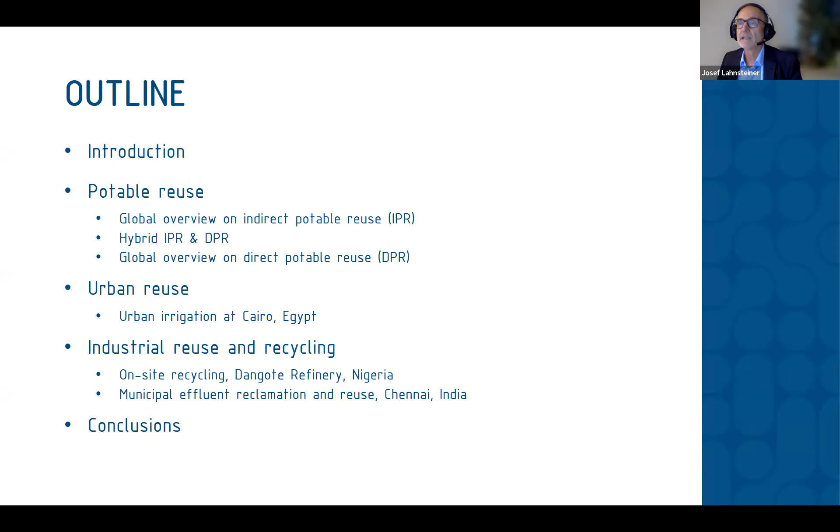The major drivers for water reuse and recycling are, first of all, water shortage caused by climate change, population growth, urbanization, and industrialization in developing and emerging economies. There are, of course, economic reasons. Used water or wastewater is a drought-proof resource. There's a lower freshwater demand, reduced wastewater discharge fees, and resource recovery is an option. Very important, there is a boost in water supply security, and last but not least, policies, regulations, and guidelines - for example, the treated wastewater reuse policy of the Indian state of Tamil Nadu, issued in 2019.

Now I will come to potable reuse. The major indirect potable reuse projects are in this slide. I would say Orange County and Singapore are the most prominent ones. Orange County was a pioneer, starting with the Water Factory 21 in 1976, and the groundwater replenishment system was started up in 2008, and the extension was extended in 2015.

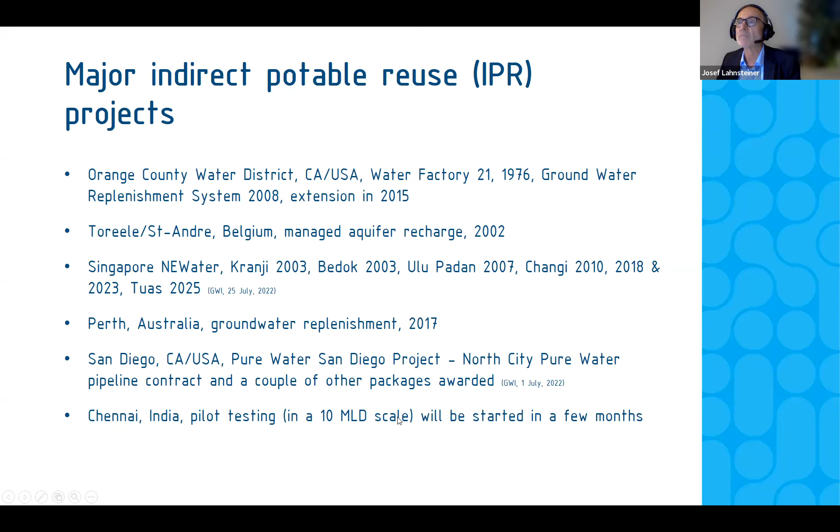The Singapore IPR scheme, New Water, is blended, but only during dry periods, with other sources - rainwater, raw water imported from Malaysia - in a reservoir, the environmental buffer. The blended raw water is treated in a conventional waterworks and distributed to the population. The sewage or used water is treated in a sewage treatment plant, which they call a water reclamation plant. The secondary effluent, the water, is reclaimed in the new water facility. Most of the water goes to industries, and as mentioned, only a small part is used for IPR. They use an RO process, therefore the RO concentrate has to be disposed of.

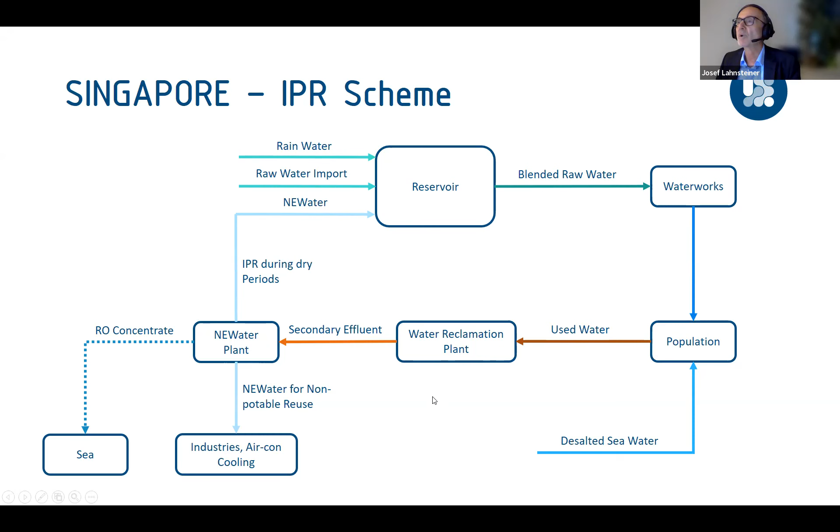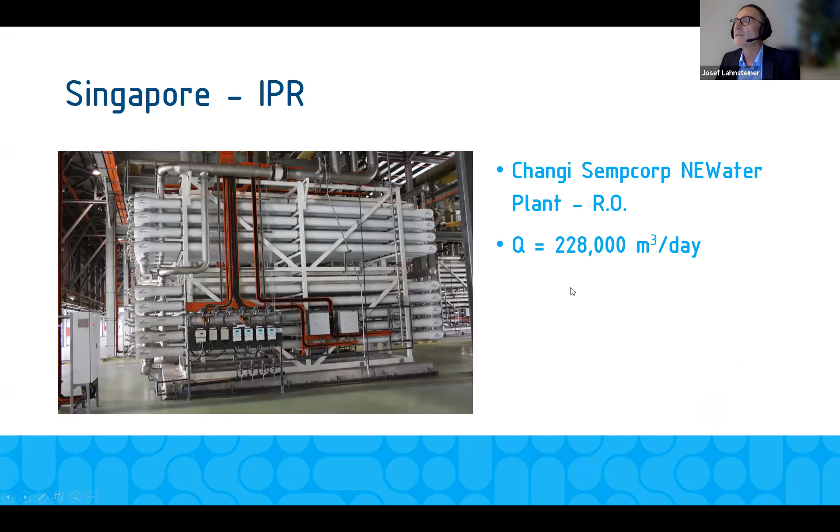This is the reverse osmosis process unit at Changi Sembcorp at the plant, and the capacity is 228,000 cubic meters a day.

And now I come to a hybrid project. It's IPR and DPR.

During regular rainfall, the reclaimed water is blended in an environmental buffer in the Gaborone Dam during droughts. The empty, silty environmental buffer is bypassed, and then DPR is practiced. The project is in the tendering stage.

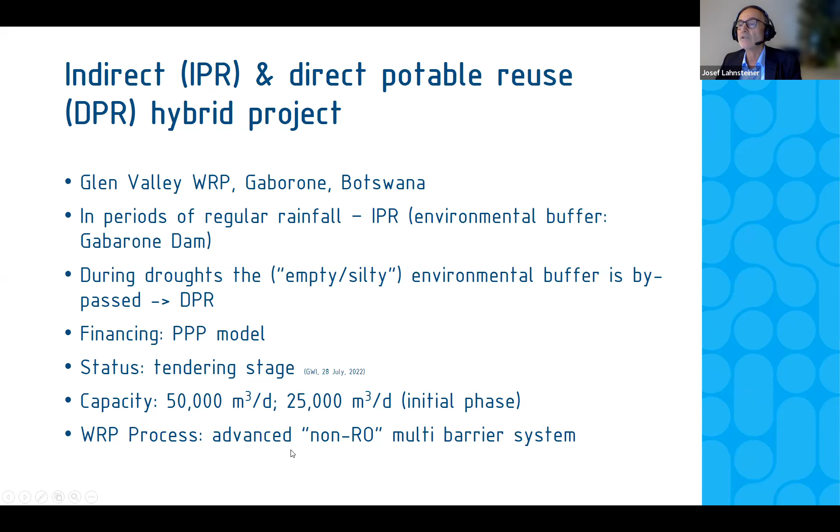It can be expected that the contract will be awarded in September or October. The initial phase capacity is 25,000 cubic meters a day, finally extended to 50,000 cubic meters a day, using a non-RO multi-barrier system. The scheme of this hybrid system: sewage treated in the Glen Valley used water treatment plant or sewage treatment plant, polished in these ponds, then treated in an advanced water reclamation process.

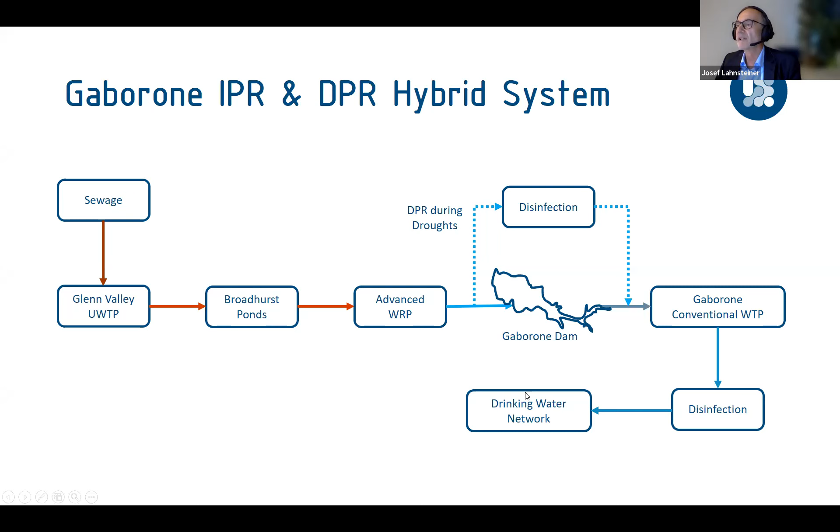As mentioned, during droughts, the environmental buffer is bypassed. Then we have DPR, and the blended dam water is used during IPR, and also DPR is treated additionally in a conventional treatment plant, the Gaborone water treatment plant. After disinfection, the water is distributed to the drinking water network.

Now, DPR projects. Windhoek, Namibia, started up already in '68, the old Goreangab water reclamation plant, which was operated until 2002. In 2002, the new Goreangab water reclamation plant was started up and has been successfully operated, meanwhile, for 20 years.

Another DPR project in Southern Africa is Beaufort West, a smaller one started up in 2011. Big Spring in Texas, blending operations started in 2013. In Wichita Falls, there was an emergency operation for 1 year. After sufficient rainfall, they switched to IPR.

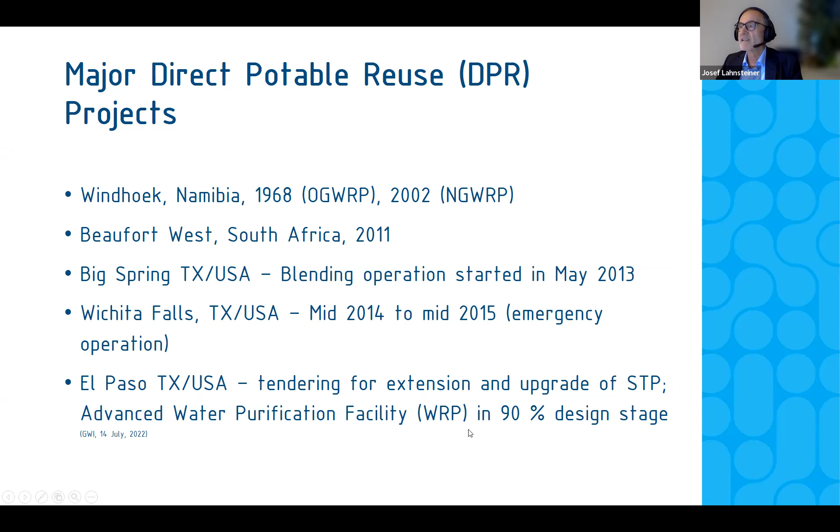And El Paso, also in Texas, this project is in the tendering stage of the sewage treatment plant. The sewage treatment plant will be extended by disc filters and UV in order to get a high quality water, secondary effluent or a tertiary effluent for this advanced water purification facility, which is in a 90% design stage.

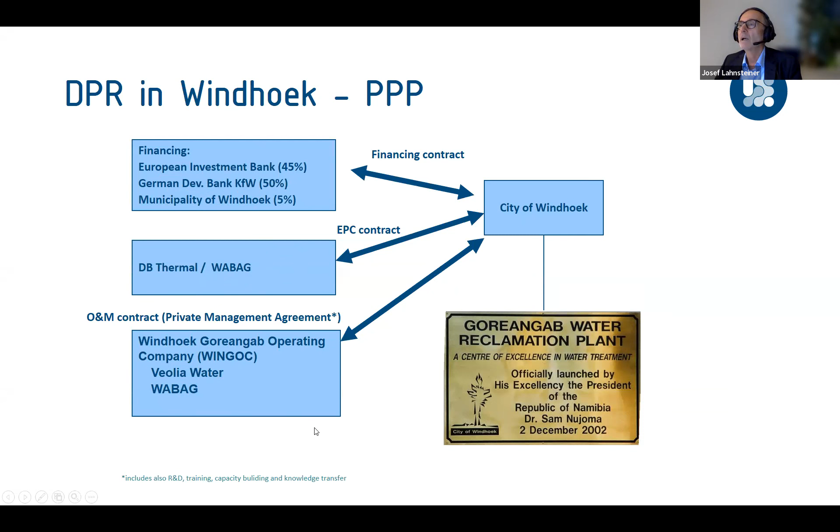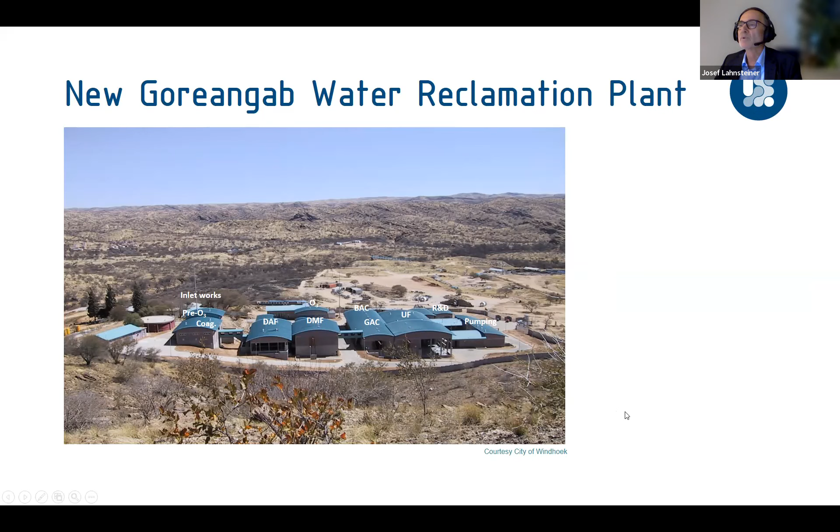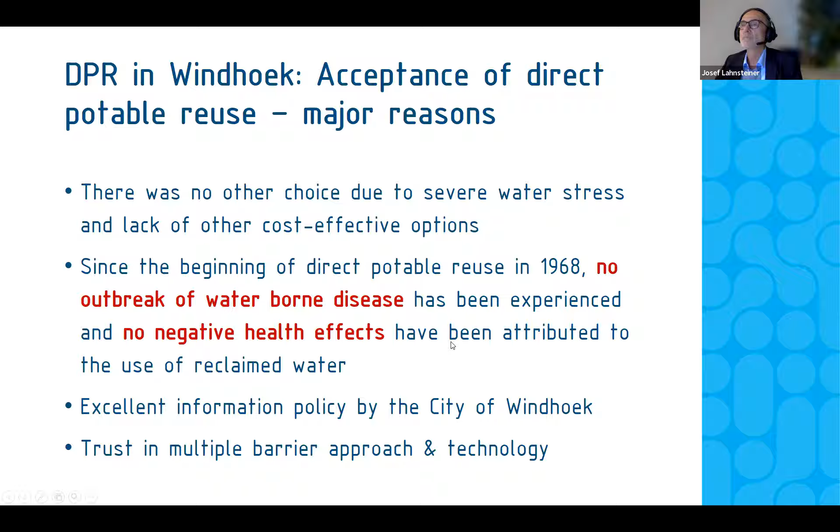Acceptance of direct potable reuse, major reasons. The major reason is, since the beginning of direct potable reuse in '68, no outbreak of waterborne disease has been experienced and no negative health effects have been attributed to the use of reclaimed water. So the Windhoek case and all the other potable reuse cases show that potable reuse is a safe water management option.

Now, urban water reuse for irrigation. Madinaty is a satellite town of Cairo. A lot of green areas, the irrigation water demand is high. The water is reclaimed by a conventional system, activated sludge with sand filtration and disinfection. This disinfected water is pumped to the irrigation network.

Capacity 2 times 40,000 cubic meters a day. Here you can see the aeration tanks, pumping station, reclaimed water standards comparable to the EU regulation Class A water.

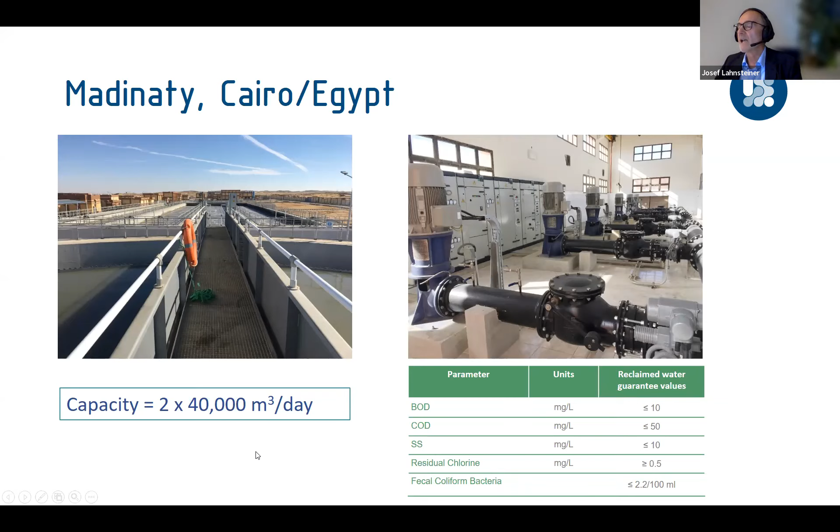Now, industrial water recycling and reuse. First case, Dangote Refinery and Petrochemical Complex, Nigeria. Nigeria is the most populous country in Africa, more than 200 million people, largest economy in Africa. The Dangote Refinery and Petrochemical Complex will be started up at the end of this year. Water management is done by raw water treatment, raw water from a lagoon, effluent treatment, and water reclamation.

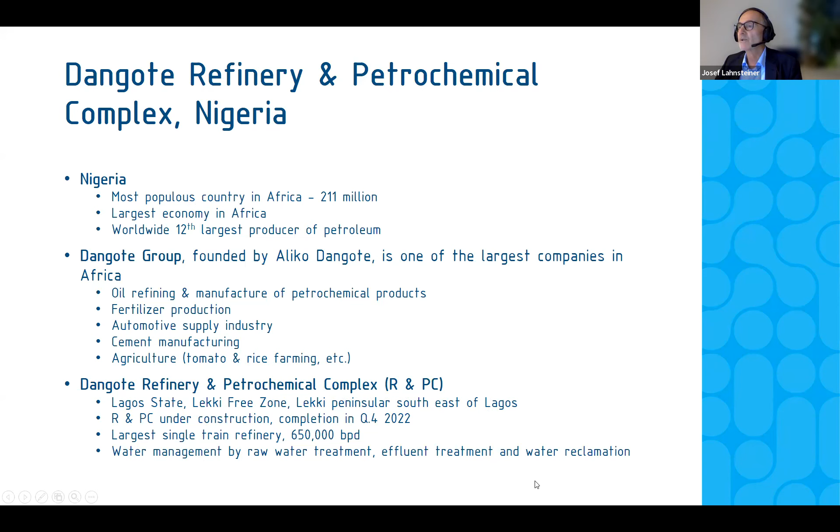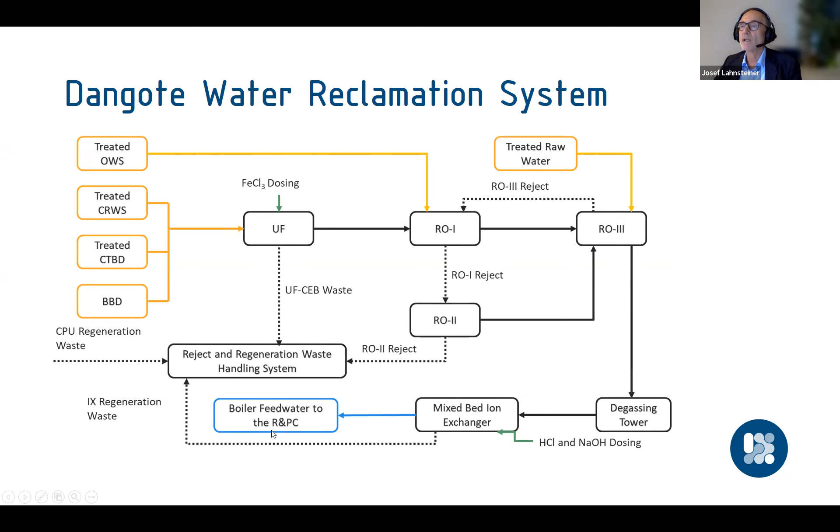This slide shows the reclamation system. Here, 4 different streams. This is the oily water stream, with core technology including ultrafiltration, reverse osmosis, and mixed bed ion exchanger. The reclaimed water is reused in the boiler of the refinery and petrochemical complex.

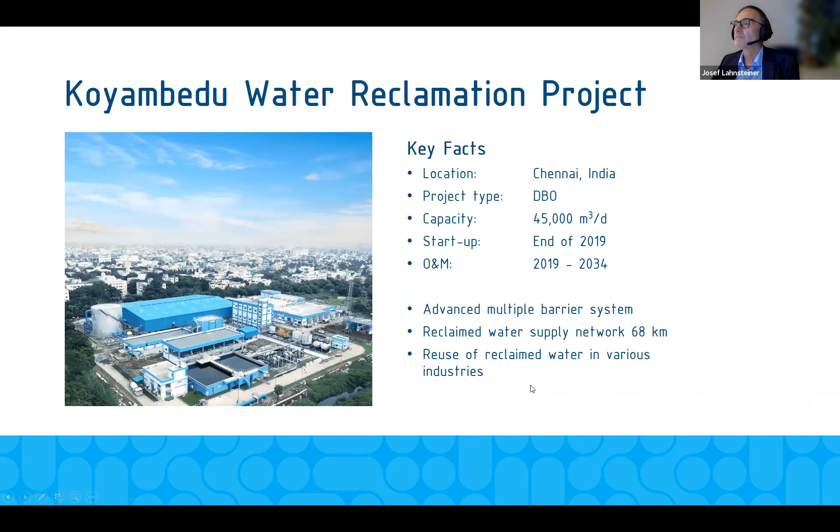Next case, Koyambedu water reclamation project in Chennai, India. Capacity 45,000 cubic meters a day, started up in 2019 after the severe drought in Chennai, using an advanced multiple barrier system, with a reclaimed water supply network of 68 kilometers, and the water is reused mainly in different industries, mainly the automotive industry.

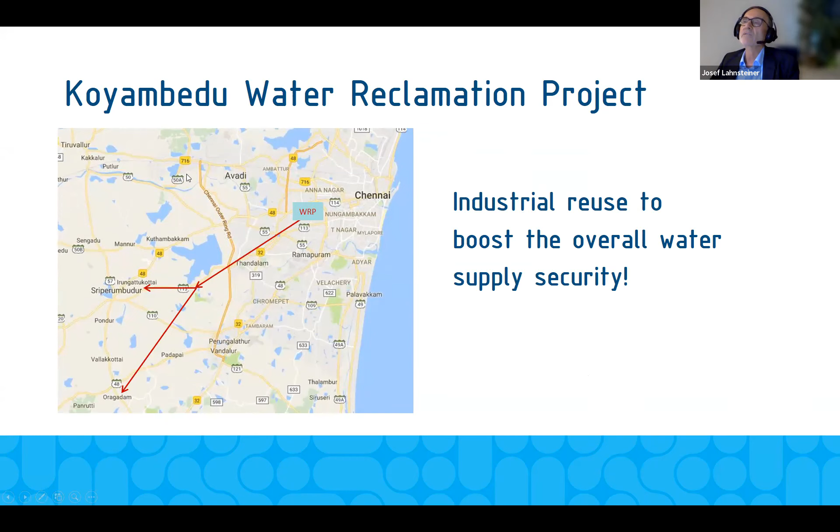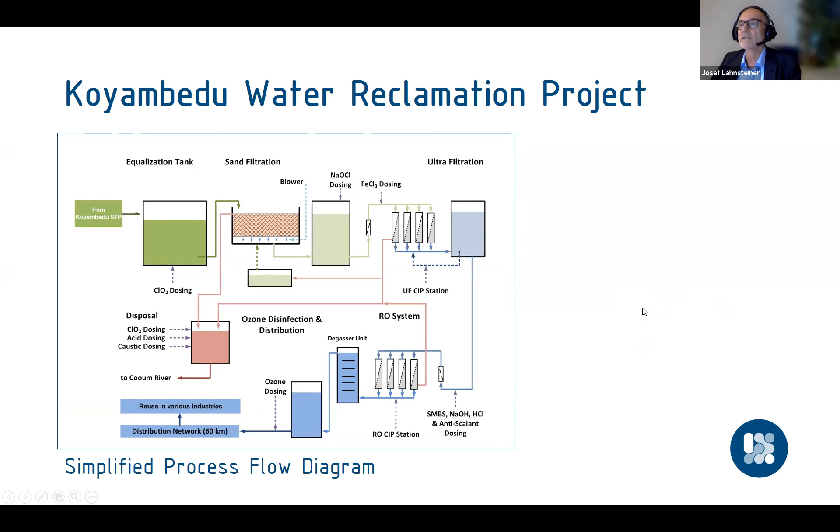Simplified process flow diagram as in Dangote, core technology ultrafiltration, reverse osmosis. The water is disinfected with ozone and then distributed to various industries. Reverse osmosis unit with Dow membranes.

In Chennai, there will be organized the 13th IWA International Conference on Water Reclamation and Reuse from 15 to 19 January next year. I would like to cordially invite you to attend this very exciting conference.

Conclusions: Large quantities of fresh water can be saved by water reuse and recycling. This boosts water supply reliability and security, which can be endangered by water stress. The environmental impact is reduced by water reclamation and reuse. In many cases, water reuse is cheaper than other options, such as transport from distant sources.

The undisturbed functioning of the water supply, especially during a crisis, is essential. This can be guaranteed by properly designed, robust, resilient, and redundant multi-barrier processes, operated and owned by professionals.

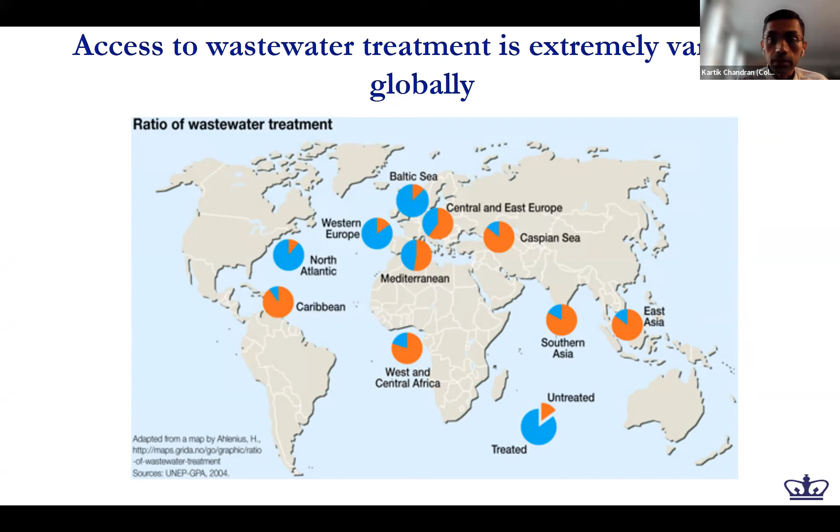And so why is that the case? If we take a look at a process configuration for conventional wastewater treatment, all of this works to differing extents in different parts of the world. But universally, almost universally, one of the major limitations that is linked to the limitation in terms of access is limitation in terms of other resources that we need to sink in to run these wastewater treatment technologies.

Wastewater treatment and reuse - one of the biggest resource limitations is associated with the lack of energy or limitation of energy in many of the countries. Again, this is nearly universal, even in the so-called first world and other parts of the world as well.

So what do we do then? We just cannot relentlessly, mindlessly keep putting the same technologies in these places and then hoping or praying that these would work. We have to change the framework. We have to change the axis, and that's what I'm going to focus on.

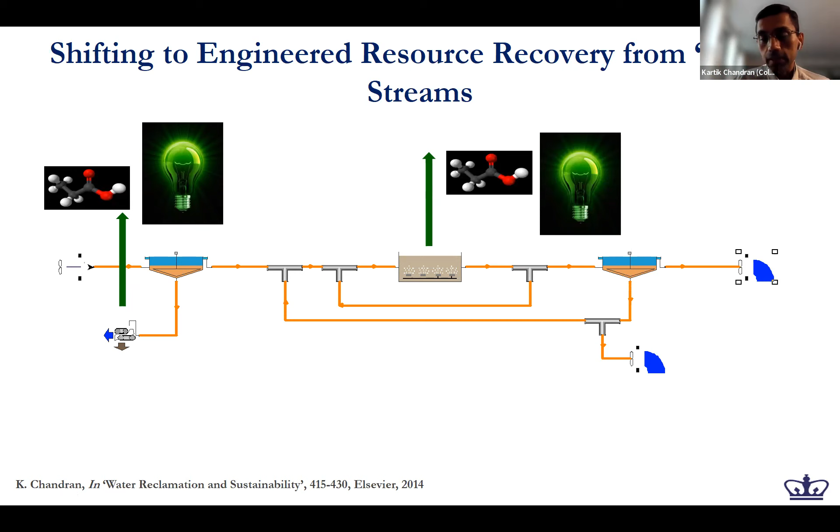When we talk about biological reactors, as is the case for most of the treatment processes, again, we are talking about end products in terms of chemicals and energy. I'll get to what these chemicals are in just a few minutes. And then when we talk about the sludge, this is where we are talking about concentrated streams, which basically means our reactors, our processes can be much, much smaller in size for the same volumetric load. And so again, we are talking about energy and chemicals.

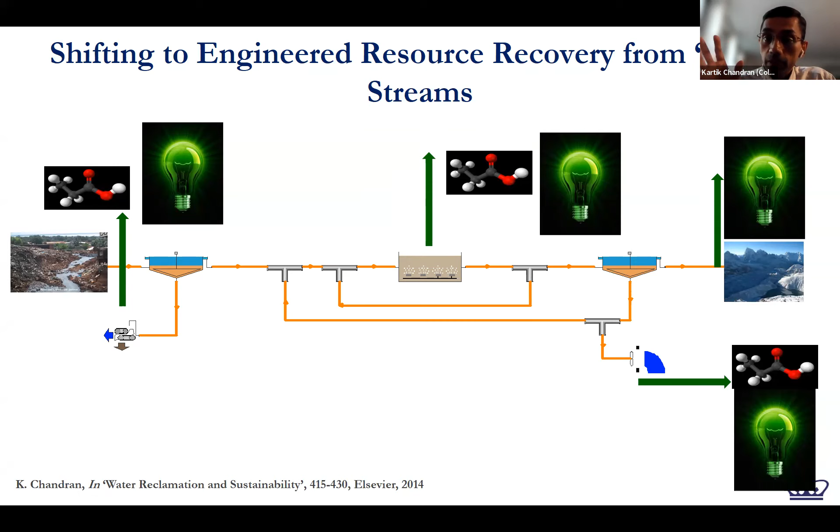And what have we not talked about here? We have stopped talking about wastewater treatment. It's now going towards recovering resources, chemicals, energy, and more from these systems, perhaps from the same treatment processes now which have been reoriented towards recovery rather than removal.

Now, the main questions still remain. Does recovery even make sense? I'm not going to be able, no one's going to be able to provide a generalized answer. We have to go in and take a look at our specific systems. So what is there? Let's start with at least trying to recognize what there is, how much there is.

So essentially the well-known culprits are carbon, nitrogen, and phosphorus. If we take a look at how much nitrogen we discharge compared to how much nitrogen we need, yes, human waste can offset a fraction. Phosphorus in human waste can offset a fraction of the demand. But the biggest bang for the buck, I think, lies in the organic carbon, because carbon gives us a lot more flexibility in terms of what we can process and what we can produce.

And that's really the highlight here. We need to start looking at carbon. It's not as if we have not looked at carbon - we've yielded to temptation and pretty much go all the way to methane.

That's something that needs to change as well. So next question is: is there a business case?

I'm sure all of you have seen schematics like this. This number here, the 50 billion figure in terms of the global demand for water and sanitation services, is a gross underestimate. But at least there is something, there's a reference, though again this is a gross underestimate.

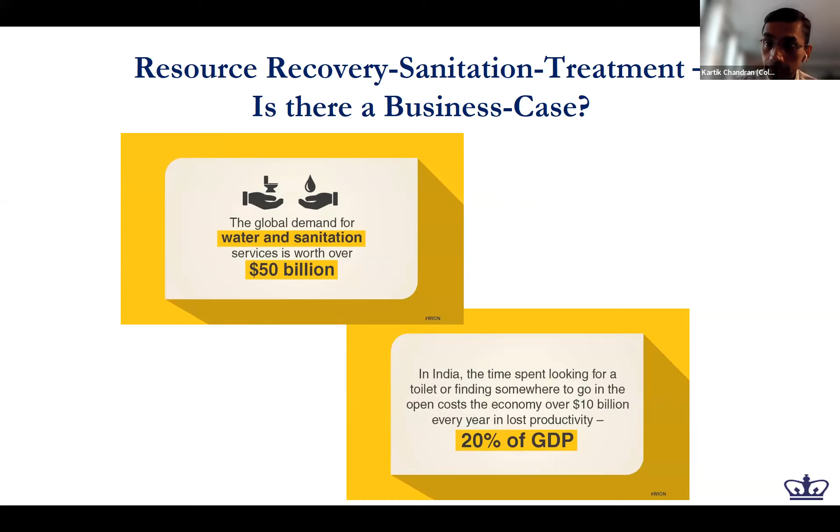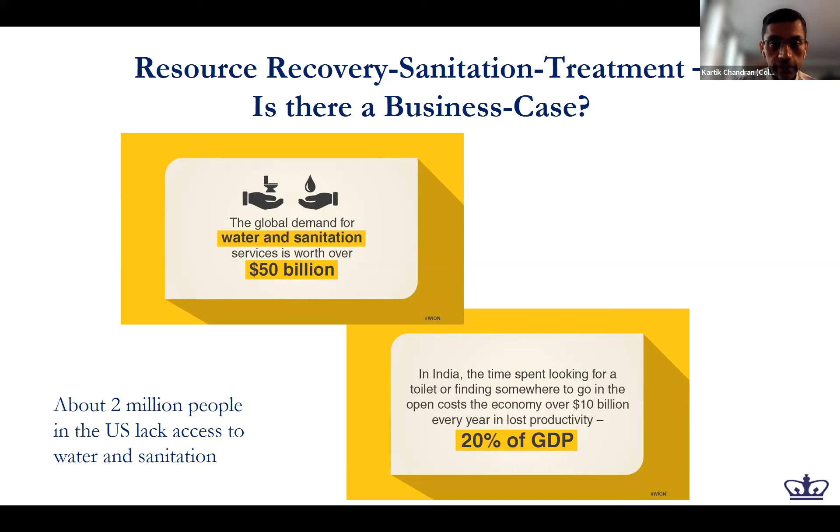And again, we've talked about India. India also has some impacts in terms of lack of sanitation. These impacts are not just restricted to India, they are universal as well. But the bottom line is lack of water and sanitation impacts productivity in terms of GDP. And then there are other figures as well in terms of populations that lack water and sanitation.

There are other benefits as well in terms of getting to advanced levels of recovery and/or reuse. The moment we start talking about carbon, nitrogen, phosphorus recovery and/or removal, we are directly going to be reducing the uncontrolled emission of greenhouse gases such as nitrous oxide.

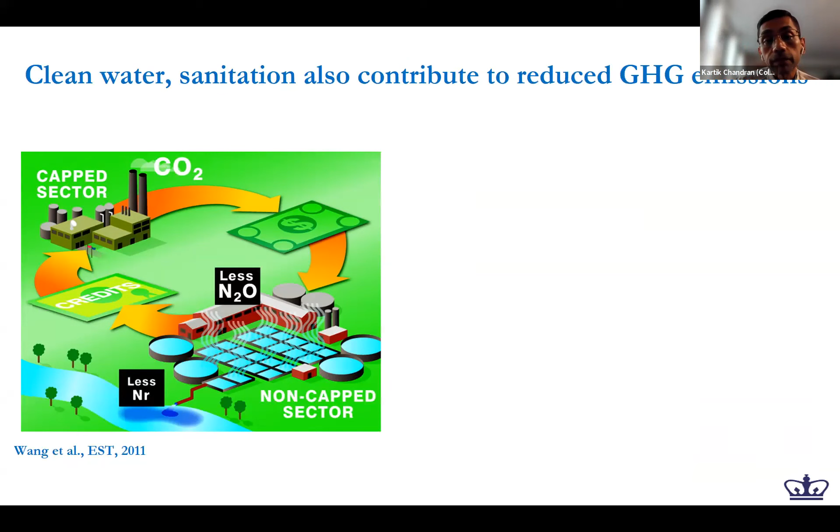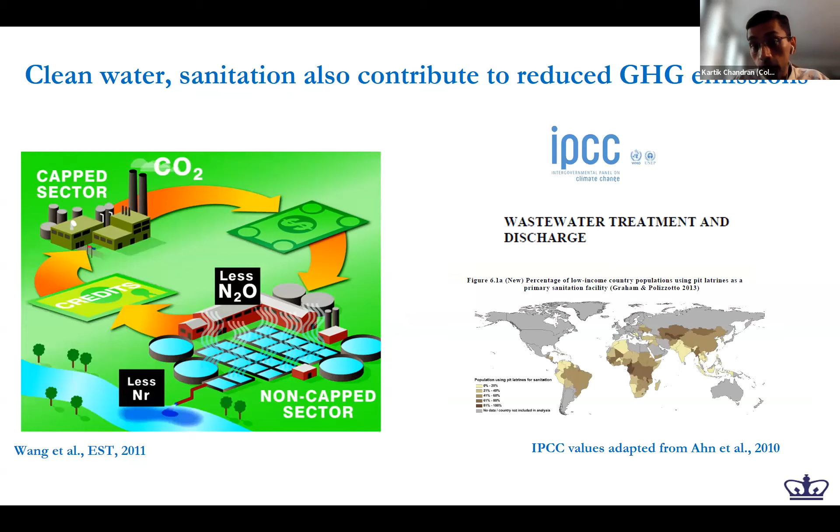So treatment, and we can come back to this during the Q&A if there's any interest. The IPCC also, in their latest report, took some values from our study in 2010. The report came out in 2019, and there again there's a direct link in terms of the degree of treatment, recovery and/or reuse or removal, and the production and emission of greenhouse gases as well.

Okay, so what can we do? I think it's fairly convincing that we need to do this. What can we do? What is there?

So when we talk about human waste, this is what we are talking about. Majority of the waste is water - that's what we're made of, that's what we discharge. And then there are some other materials. In the fecal matter, it's primarily carbon, organic carbon, and all the pathogens. And the urine streams contain the nitrogen and phosphorus and some unbiodegradable carbon.

So we can basically go step by step, fraction by fraction, and then decide what we need to make, where in the world. That's the kind of framework that we need when trying to figure out what to make, what to recover, where to do this.

And then if we can develop technologies which are really agnostic to the waste stream - waste in quotes, because these are not really wastes - that'll be good as well.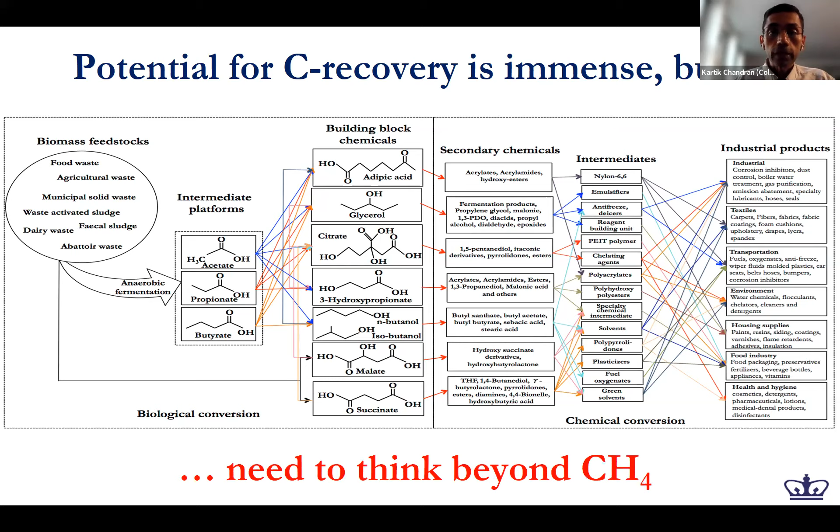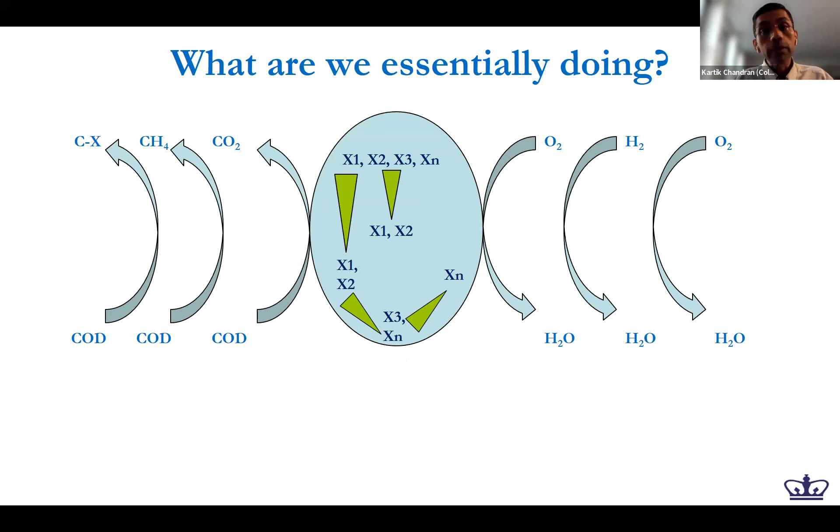So what is it that we are trying to do from a more technological perspective? I'm just going to fly through this. All we are trying to do is - if you consider this oval as a microbe, as a microorganism - essentially what we are trying to do is play with different substrates on the left-hand side, giving it co-substrates, and then coaxing or encouraging these biological processes to make newer things, not just methane, more useful products basically.

Okay, scale becomes very important. So one question could be: are we going to do this at full scale in a centralized treatment process? Maybe. There is also, on the other hand, a very high degree of attraction in terms of scaling down such recovery processes, right?

It's not a volumetric scale down. It is essentially stopping the dilution of human waste with all other non-human waste streams, which allows us to make these systems much more efficient and much more productive. So the issue of scale also needs to come into the conversation, into the designs as well.

And then with scale, we can fit these systems into different environments, into different communities, in which case nitrogen and phosphorus come into the picture now, and then there's a link to food production as well. So finally, I would say, just to round all of this off, that the potential is there. The potential is actually quite immense. There are technologies coming up.

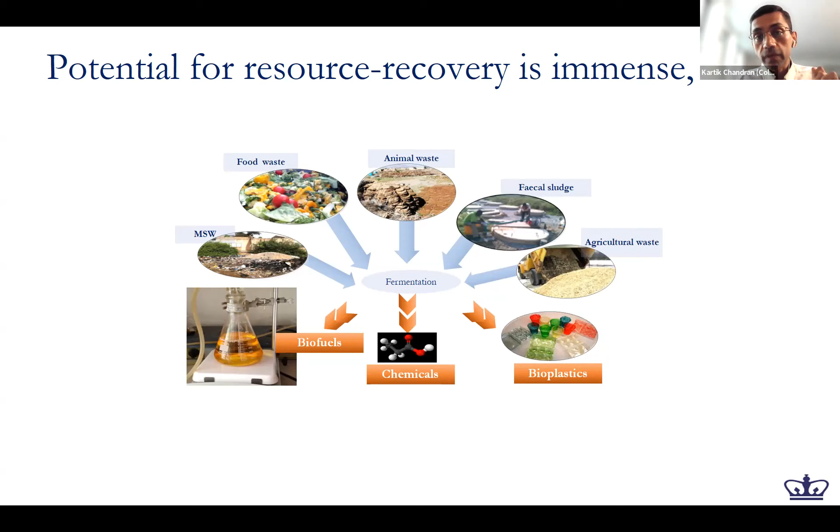There are processes in place right now in some parts of the world, and there's immense interest. However, we should not shift our mindset completely so that we are competing with fuel production, chemical production, plastic production, and materials production. We need to do all of this to sustain and support a different objective, which in our case is providing a higher degree of access to water and sanitation. That's, in my view, the higher objective. If we can make fuels from fecal sludge to run a fecal sludge treatment process, that to me is much more attractive rather than sitting in the middle of nowhere just making a chemical that no one's going to use.

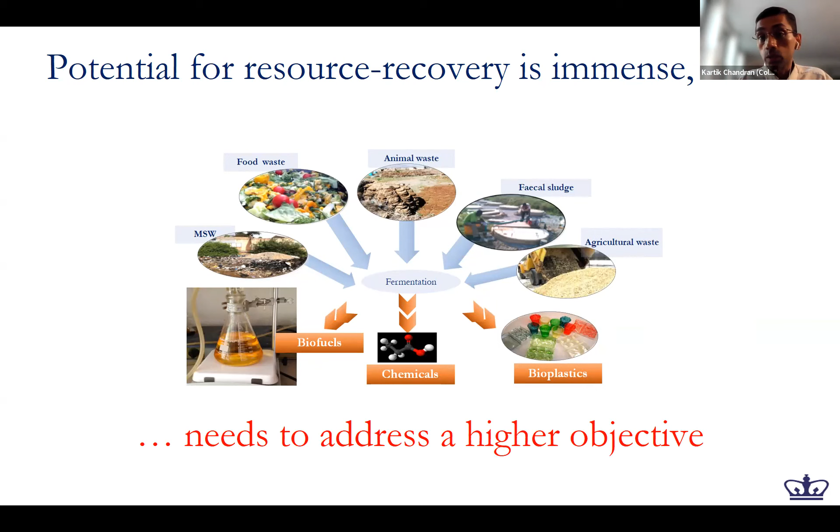So that's all I have. Thank you again for having me as part of this session. Thank you very much, Kartik, for your presentation and giving us a good overview of the resource recovery potential.

We've got some time for one or two questions. If you can use your chat line to ask the questions. Maybe I can start with a question about the scale of implementation of those resource recovery options. When does the scale become cost effective?

Yes, so again, there is not a single answer, right? It really depends on, it's almost like an optimization process here. One of the decisions to be made in many cases is what to recover. So if you're starting to talk beyond biogas, beyond methane, then there needs to be a connection to some industry that can use the products. I'm going to take a very, very simple example.

Let's say we are talking about anaerobic fermentation of sludge to produce precursors of biogas, precursors of methane. These are volatile fatty acids. This is what happens when a digester goes sour. We think about this as a negative product, but in fact, it's not. These chemicals, these fatty acids can actually be used within the boundary of a treatment plant to remove nitrogen and phosphorus, or even recover phosphorus for that matter. So in this case, the scale could be almost seamlessly within the treatment process. Imagine all the sludge that comes into a centralized treatment plant, but instead of that sludge being dumped or converted into something that's not easily used, it's being converted into fatty acids that can be used within the boundary of the system. So this can happen at a large scale.

The site has been the Balearic areas, where 14 sites use reclaimed water for irrigation. 5 of them have been selected, and 11 parameters have been analyzed during 5 years for 11 different crops.

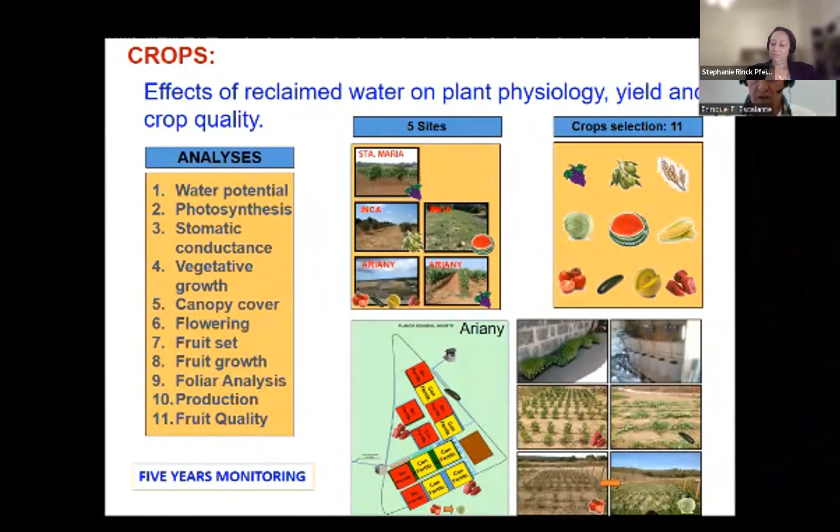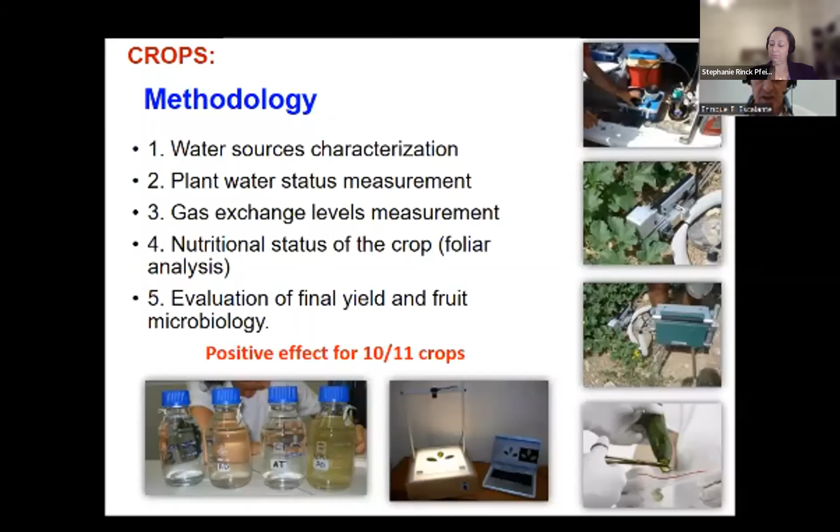The methodology was to track the evolution of 5 different parameters, and the results were positive for 10 out of the 11 crops analyzed. Regarding the soils, the methodology was also to track the evolution of 3 different parameters, concluding that no effect after a sufficient washing dose was detected in the soils of the 5 sites.

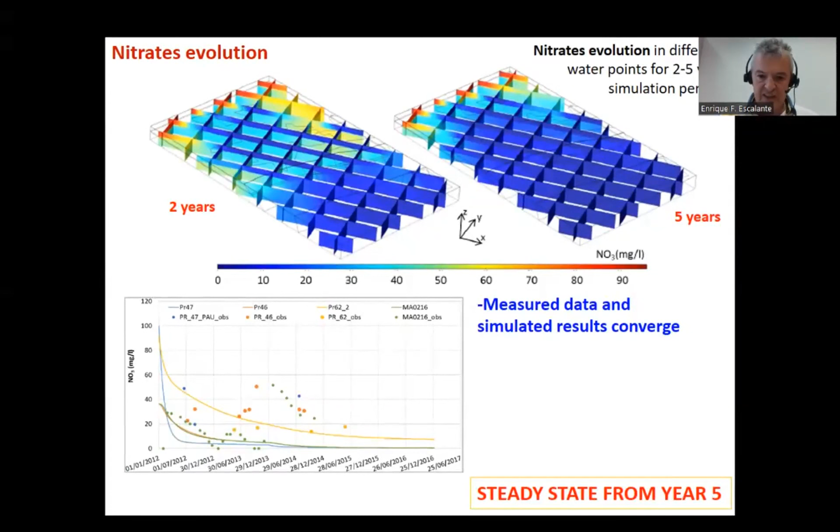Regarding the aquifers, the COMSOL model was used to compare the results for the 5 years of monitoring, and from the model, different parameters were tracked, such as nitrates, DOD, etc. The results showed the system began to work in a steady state from the 5th year.

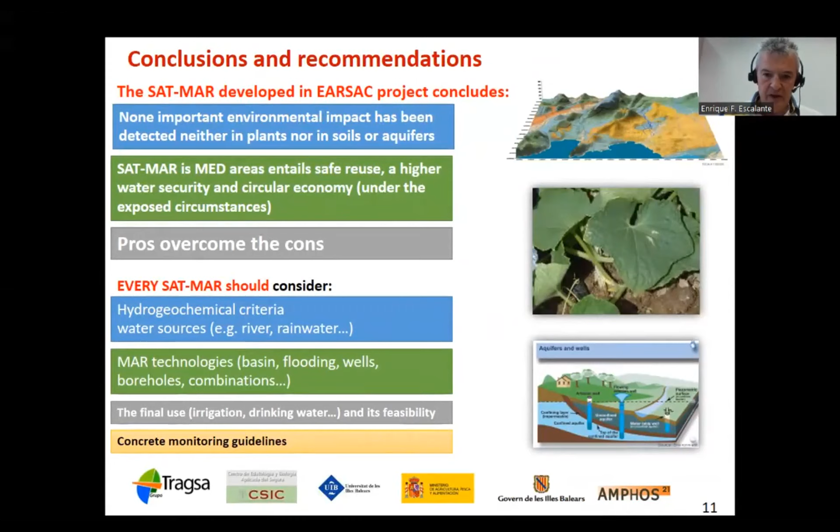In conclusion, no important environmental impact has been detected in plants, soils, or aquifers, and the SAT-MAR in MED areas entails a safe reuse, higher water security, and circular economy, at least for the given circumstances. To broaden this information, there are 2 publications of this project on the internet. Thank you very much for your kind attention.

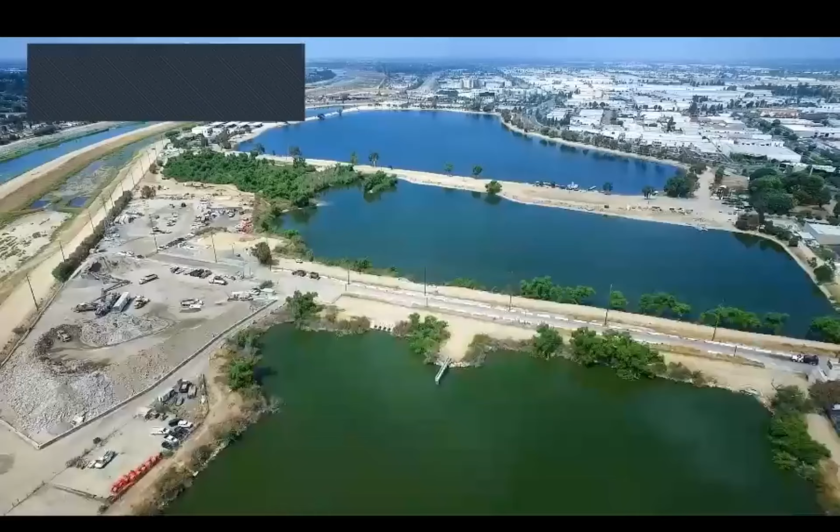Welcome to Orange County, home of the Orange County Water District, a world-renowned leader in groundwater management and water reuse. Orange County Water District manages a large groundwater basin in North and Central Orange County. We are very lucky to have this basin because it provides approximately 77% of the water to 2.5 million people in our service area. 19 local water suppliers pump water from the basin and supply it directly to their customers, providing a safe, reliable, and low-cost water supply.

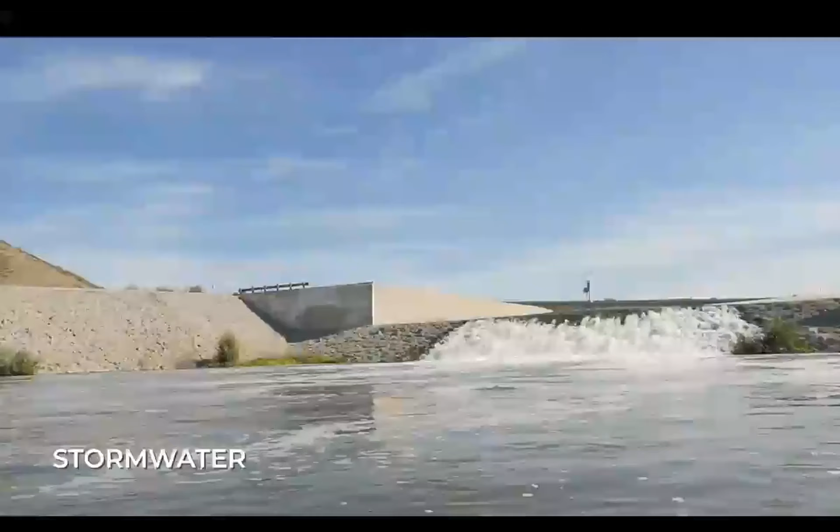Our mission at OCWD is to manage and protect this basin so it can continue to be the main source of water for these agencies, now and for future generations. There are several sources of water we use to recharge the basin: Santa Ana River flows, natural rainfall, stormwater, untreated imported water from Northern California and the Colorado River, and recycled water. In recent years, recycled water has grown in importance as a source of our supply and now makes up more than 30% of recharge to the basin every year.

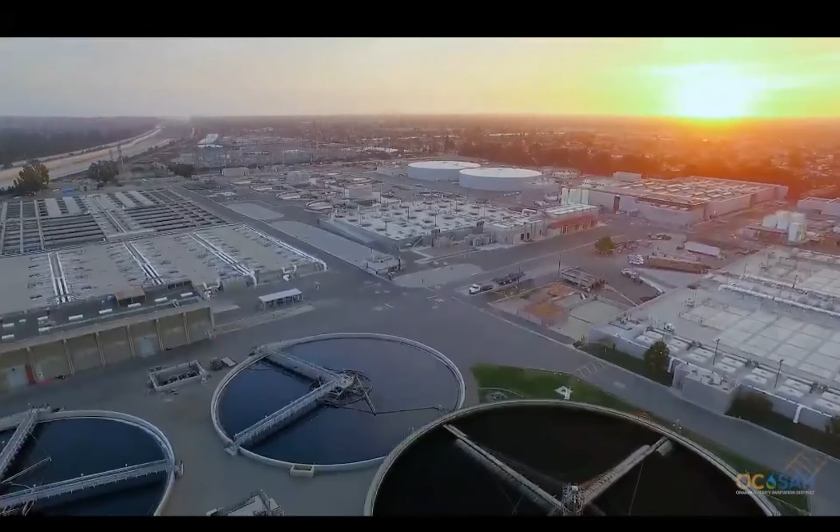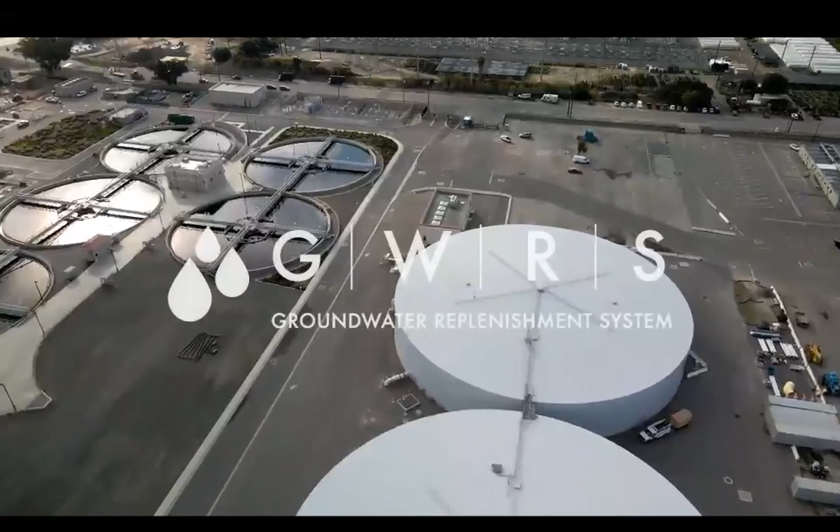In 2008, OCWD, in partnership with the Orange County Sanitation District, constructed the groundwater replenishment system. Orange County Water District takes the Sanitation District's reclaimable wastewater and purifies it to near distilled quality, using a 3-step advanced purification process consisting of microfiltration, reverse osmosis, and ultraviolet light with hydrogen peroxide. We are the largest indirect potable reuse facility in the world.

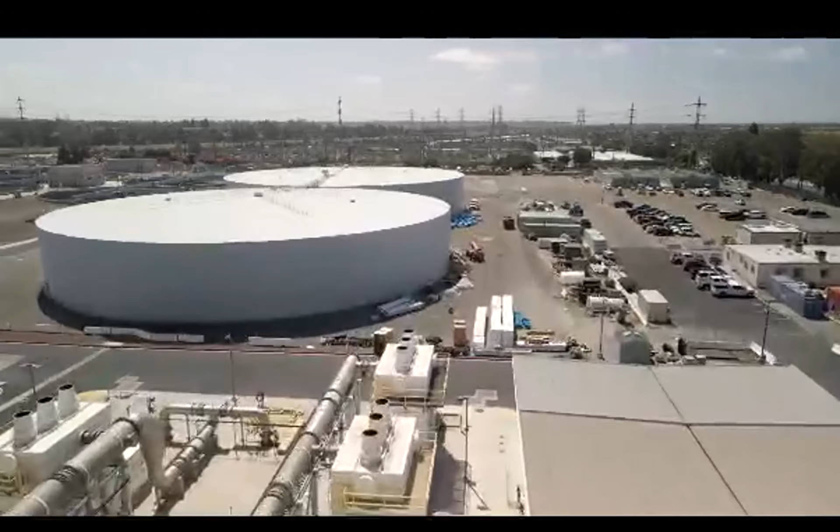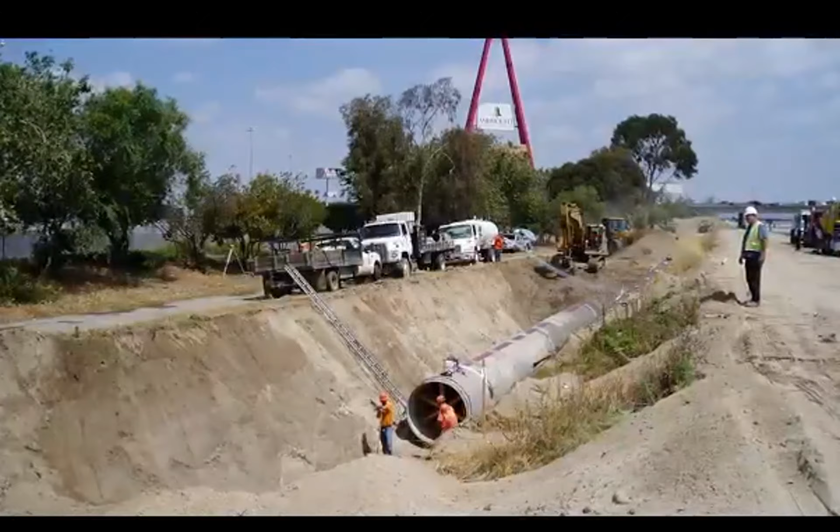The groundwater replenishment system produces 100 million gallons of water. Approximately 80 million gallons is pumped through a 13-mile pipeline to our recharge facilities in Anaheim. The remaining water, approximately 20 million gallons, is injected into a seawater barrier about 4 miles inland from the coast to help prevent seawater intrusion.

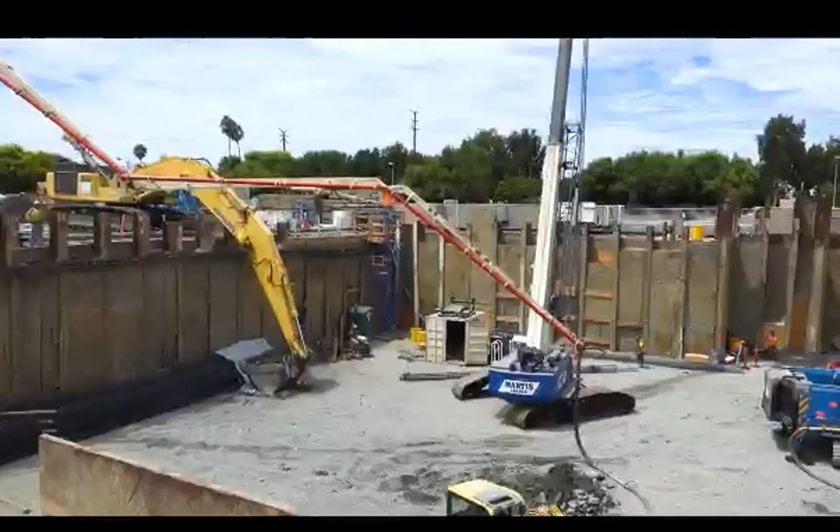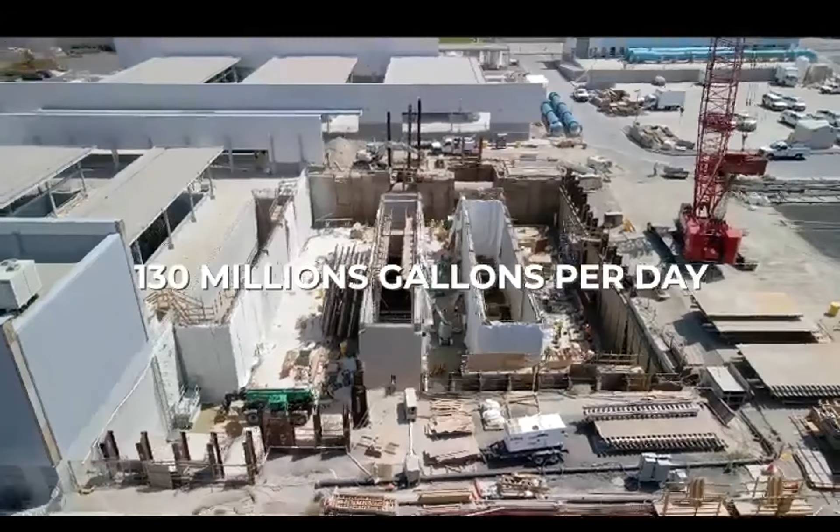The groundwater replenishment system has been in operation since 2008. Currently, we're constructing the final expansion of the project, which will bring total daily production to 130 million gallons by the year 2023. This will provide enough water for 1 million people and will result in treatment of all the reclaimable water available to the Orange County Sanitation District.

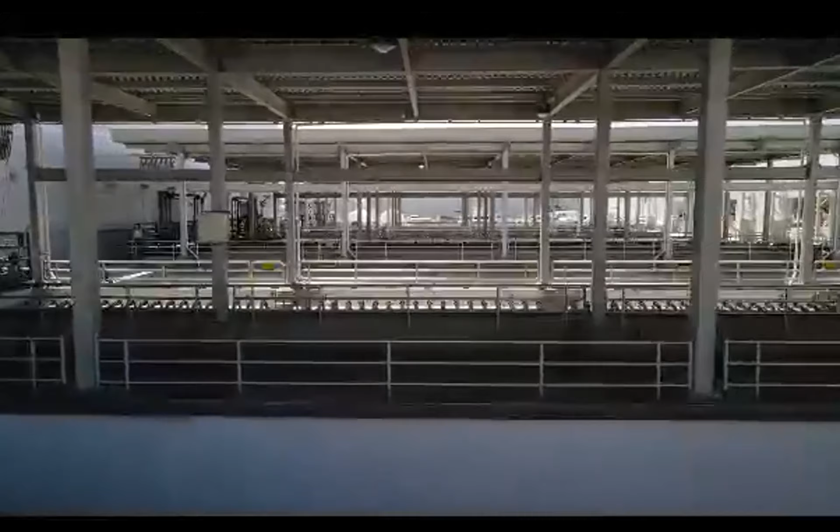North and Central Orange County's future depends on reliable water supplies. The groundwater replenishment system provides our region with water it can count on and serves as a model project for other regions throughout the United States and the world that are or will be facing natural and man-made water supply challenges.

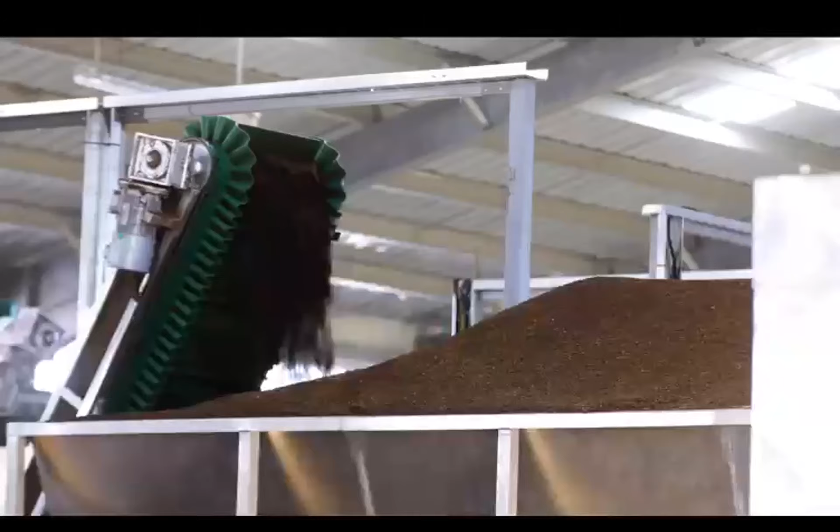At Sanergy, we view ourselves as the solution for cities. Cities have a massive problem with both sanitation and organic waste. Around the world, cities generate about 1 billion tons of sanitation and organic waste every year, and we've realized that the majority of that waste doesn't get treated—it's just dumped in the environment.

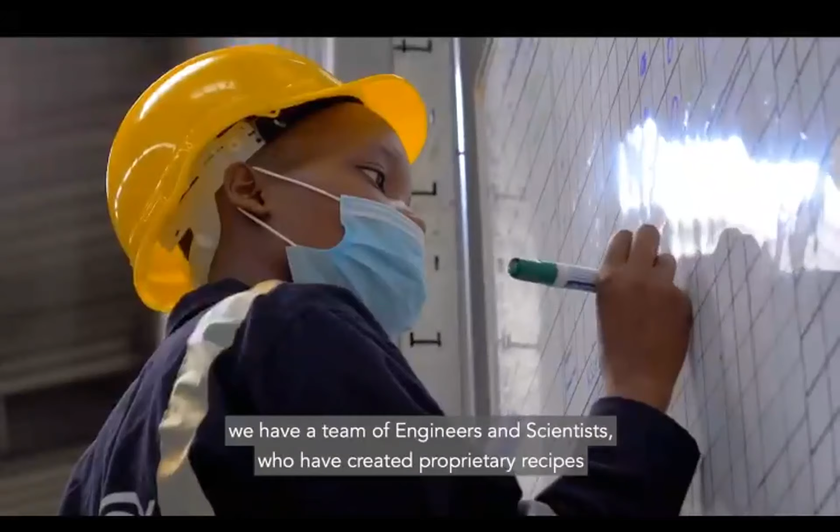At Sanergy, we exist to solve that problem, employing a circular economy approach to collect both sanitation and organic waste from cities. Then we turn that into useful end products. We receive sanitation and organic waste, and our team of engineers and scientists have created proprietary recipes.

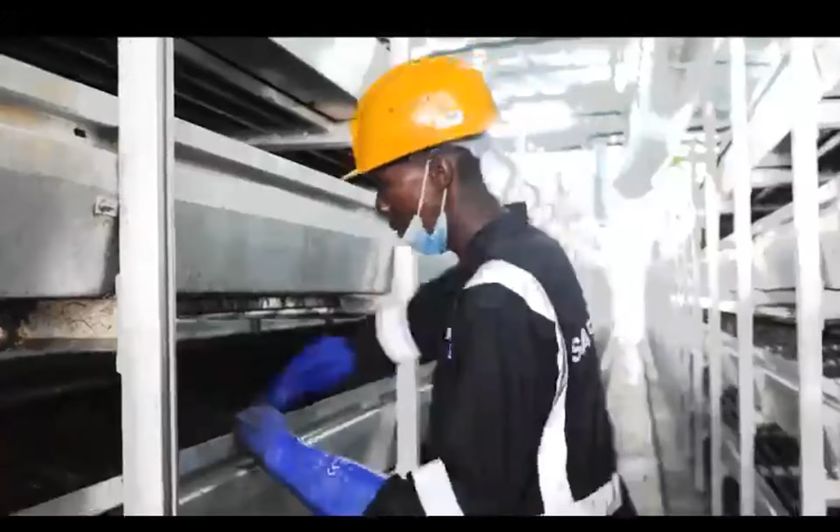We feed these recipes to insects called black soldier flies. The black soldier flies eat, they grow, we harvest, clean, pasteurize, then dry and package the black soldier fly larvae to be sold as insect-based protein.

After the flies eat, they leave residue. That residue is taken and converted into organic fertilizer, mixed with agricultural waste, then taken through what we call thermophilic composting. The organic fertilizer we produce is called Evergrow, which is sold to more than 15 counties across Kenya.

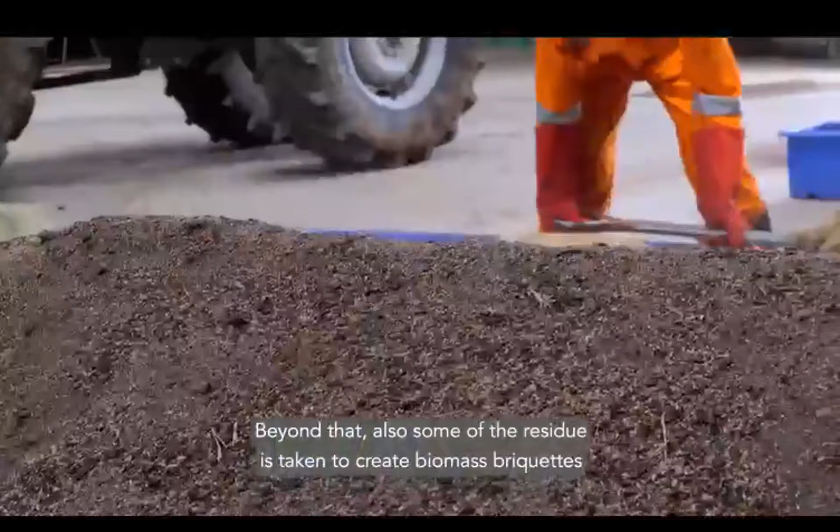Farmers who use Evergrow, especially in horticulture, are seeing more than 30% increase in yield. Beyond that, some of the residue is taken to create biomass briquettes, where we compress it at high temperature and high pressure to create briquettes used for industrial boilers and other industrial heating applications.

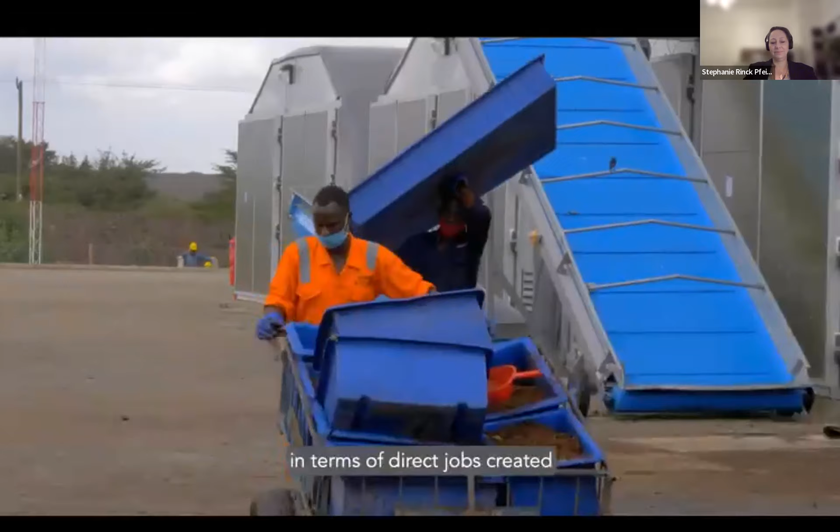In terms of the economy, first and foremost, job creation—we have over 100 people working with us here at Sanergy in direct jobs. If you look into our value chain, especially on the sanitation and organic waste side, we have upwards of 2,000 people who, in one way or another, benefit from the value we're creating, whether on the agricultural or sanitation side.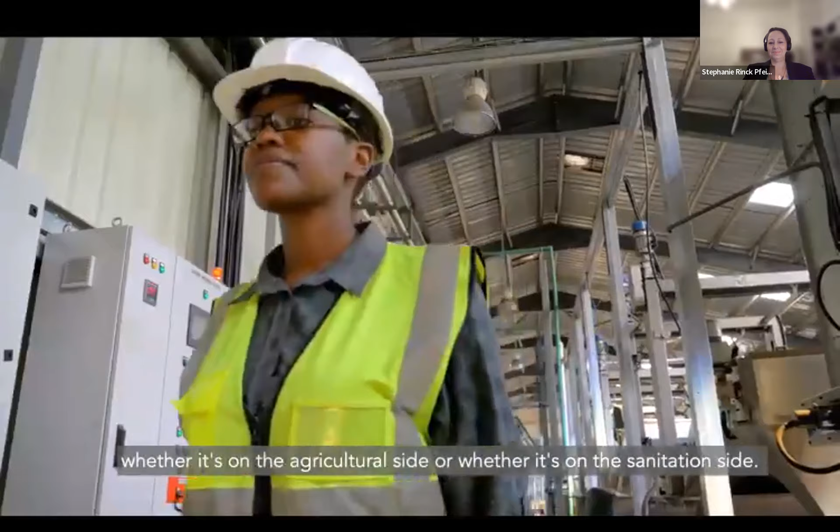So it's a beautiful story about solving problems on the sanitation or waste management side, then using circularity to solve problems in agriculture—in terms of animal health from the insect-based protein perspective to feed our animals, and in terms of soil fertility through organic fertilizer.

We have the goal of, in the next 5 years, accessing more than 1 million tons of waste per year. We look to extend into other cities in Kenya, like Kisumu, Mombasa, Kilifi, then beyond that into Africa, and then moving into Southeast Asia as well—because this is not just a Nairobi problem, we're talking about beyond Nairobi.

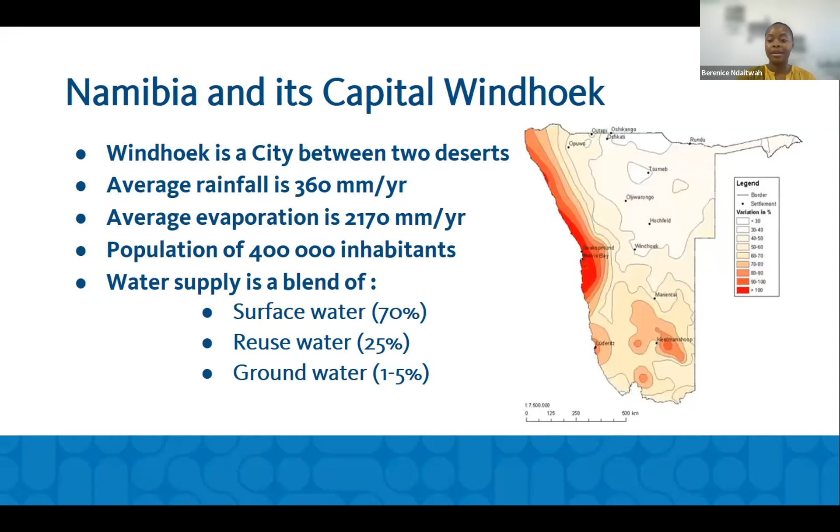So the current water supply to the city: as I said before, we have a 3-dam system, Omatako, Von Bach, and Swakoppoort Dam. The first of these dams came online in 1968. During this period, there was a lot of infrastructure development because the city had run out of water. Traditionally, during the city's settlement, it was supplied through underground water, and the boreholes had been over-abstracted, so the city ran out of water.

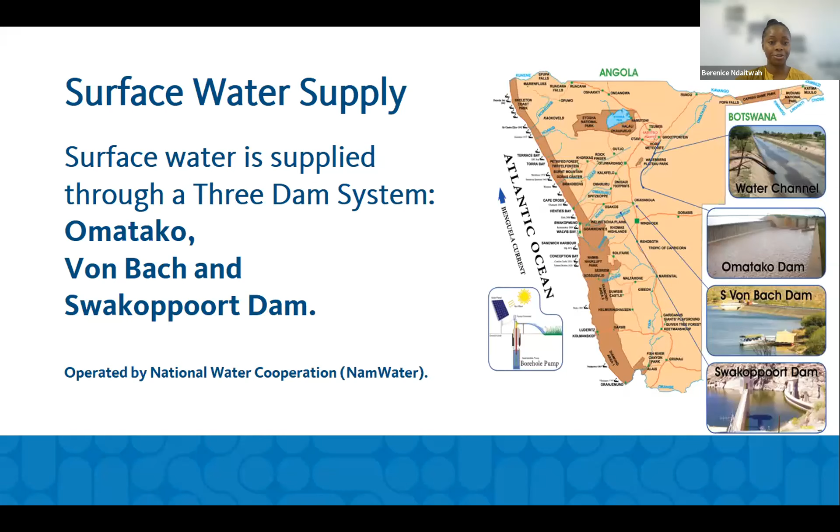So Von Bach was brought online in 1968, and the first reclamation plant was also brought online in 1968 to supply city residents with direct potable reuse water. Currently, the system is operated by the National Water Corporation, NamWater, which treats the water and supplies it to the city of Windhoek for the population. The second source for the city of Windhoek is the new Goreangab reclamation plant, which was brought online in 2002.

It supplies 21 megaliters per day of water. This process was designed to treat secondary effluent from the wastewater treatment plant to drinking water quality, to directly supply the city of Windhoek's residents. Because it is DPR and not IPR, it abides by a high standard of water quality parameters. This is privately operated for the city of Windhoek.

And then the third supply is the underground water supply. This has been since the original settlement of the city of Windhoek. This was the main water supply, and after over-abstraction, when the wells had run dry, the city then changed this, brought on other supply streams online, and this became a strategic and emergency water reserve. This is operated by the city of Windhoek.

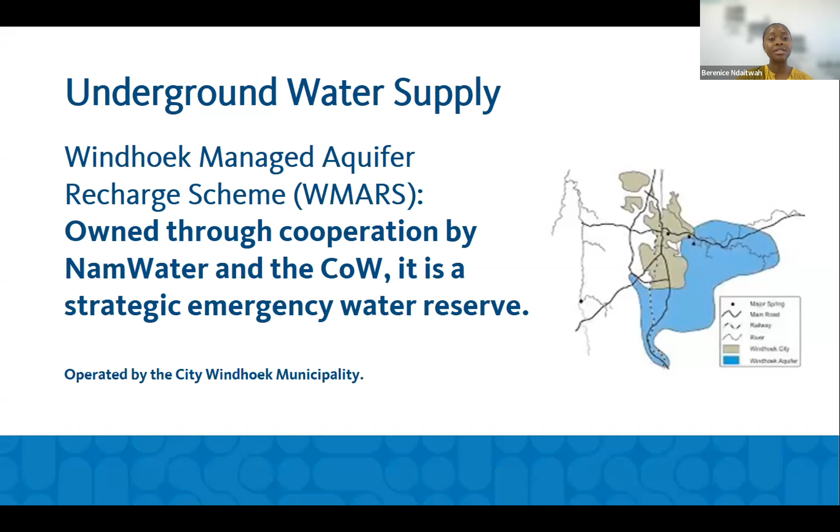So just a quick look at the water reuse scheme, which was spoken about by Dr. Lahnsteiner, a previous speaker. We have the new Goreangab water reclamation process, which is the DPR water plant in the city of Windhoek.

Traditionally, the system was designed to have two raw water sources, the Gammams Water Care Works and the Goreangab Dam. The Goreangab Dam has been offline since 2008.

After which we have raw water blending, coagulation, dissolved air flotation, rapid gravity sand filtration, ozonation which is the main disinfectant step in the process, biologically activated carbon filtration, followed by granular activated carbon filtration, and then ultrafiltration as a polisher step. The process is based upon the multi-barrier principle.

This principle is designed to have more than one process unit to remove any pollutants in the water. The final barrier is that the blended water stream in the distribution should not be more than a third reuse water, so in case anything happened, there should be some dilution in the distribution process itself. This process produces a high quality water supply to the city.

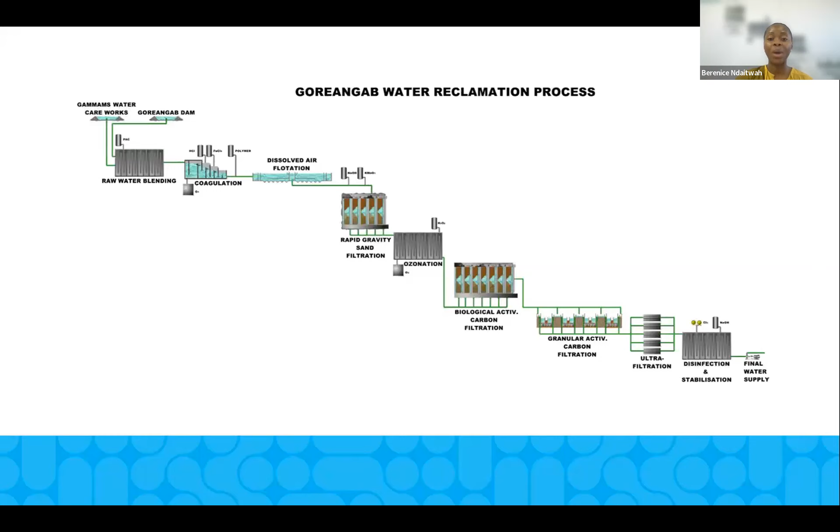When water quality issues were experienced during recharge of the aquifer scheme, it was decided to use a blend of both reuse and surface water supply to the Windhoek managed aquifer recharge scheme. So the reuse source of water that already existed in the city of Windhoek made it possible for recharge to actually take place in the city of Windhoek.

I'd like to speak a little bit more about the Windhoek managed aquifer recharge scheme and how it came about. The aquifer itself had been studied since the 1950s, because it was the main source of water for the city of Windhoek.

It is a predominantly confined aquifer, characterized by faulted and fractured clean, or you could say pure and impure, quartzite, as well as schist. But the majority of the area in which injection or re-injection is done is mainly in the quartzite section of the aquifer itself.

There are about 49 boreholes currently in place, 9 of which are for injection. The injection boreholes are separate from the abstraction boreholes in the Windhoek Aquifer Recharge Scheme. The different boreholes have different temperature ranges, where some are very hot, at about 90 degrees, and some are at a normal temperature of 25 degrees.

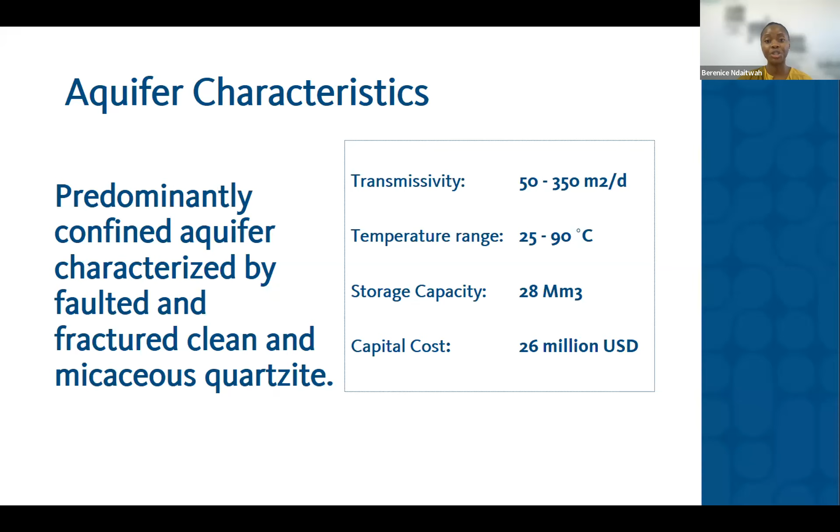The capital invested so far is about 26 million US dollars, funded through local government, the city of Windhoek itself, as well as the national government, and part of it, about 4 million, will be funded by the National Water Corporation to realize the scheme.

Just a few points. Currently, the installed injection capacity of the aquifer scheme is about 3.75 million cubes per year. The abstraction capacity is 16 million cubes per year.

The natural recharge wouldn't be enough to actually keep the aquifer scheme online. The estimated losses, because it is an underground buffer, is about 3%, which is very low compared to the evaporation rates experienced otherwise.

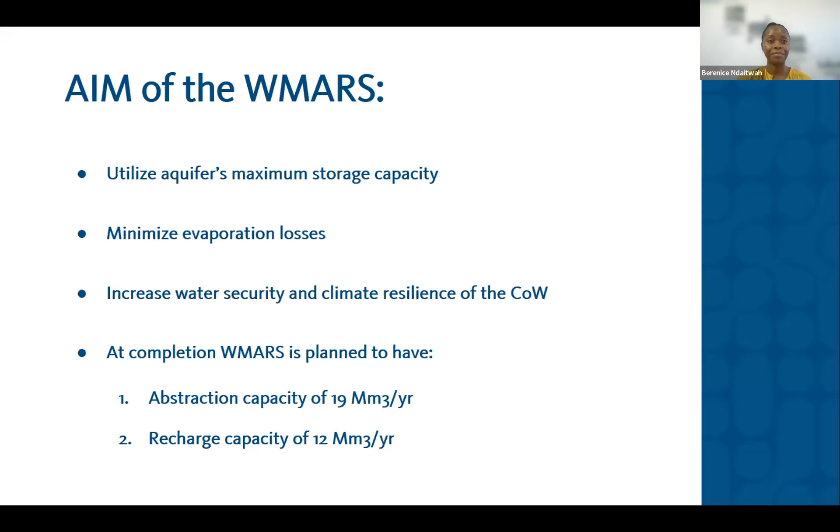So a very important and key contentious point was the injectant quality. Originally, the scheme was targeting surface water, to bank surface water during times of good rainfall, and then have 100% injectant be surface drinking water. But unfortunately, the quality of the surface drinking water wasn't meeting the required quality for the injectant.

After various studies with the CSIR, as well as the University of Pretoria in South Africa, it was decided to blend the water, with a 1-to-3 ratio of reused drinking water to surface drinking water, in order to meet the required water quality. To date, the recovered water quality has averaged about 610 milligrams per liter TDS and 1.1 milligrams per liter DOC.

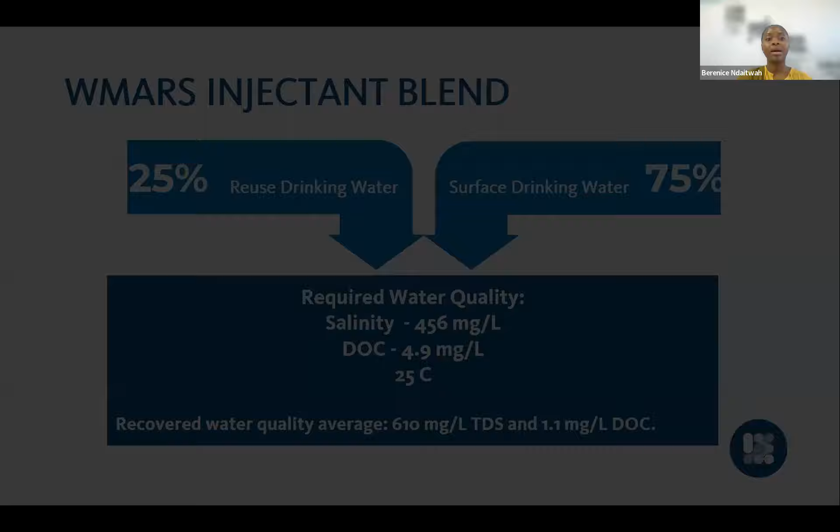So to conclude, the Windhoek Managed Aquifer Recharge Scheme has achieved about 3,330 million liters that have been banked underground. It was able to environmentally and structurally protect the aquifer from further degradation, and also refill the levels that had been previously overmined. It has been a more efficient storage compared to surface dams, where we have seen high evaporation losses.

The losses are negligible for the aquifer recharge storage scheme. We have increased water supply security during droughts, where about 6 million cubes were abstracted per year during that drought season. Due to banking, we had the water reserves to actually supply the city of Windhoek. So it's been a key tool in implementing climate change adaptation strategies for the city, and to provide residents of Windhoek with a safe, clean drinking water supply during times of crisis.

I just want to share with everybody here, if you'd like to see more information, we have had recent reports on the aquifer recharge scheme, including the reclamation plant, and you can go to our website. So I'd like to thank you all for your attention.

So I want to thank everyone for actually opening up our mind and direction, that the next two or three sessions we would be comfortably talking about black soldier flies, because they are a sophisticated machine, as well as all the advanced membrane systems that also put the kind of barriers we require to make this realizable going into the future. So thank you all that have opened up this pathway and shared this wonderful knowledge.

It's been a privilege, and I'm hoping that you'll have set the tone for the next two days and many other sessions that's going to talk about the potential value of wastewater, sanitation, and sludges into the future. Thank you very much, and thank you to my chair for ably hosting us today in this short session. Thank you. Thank you all.